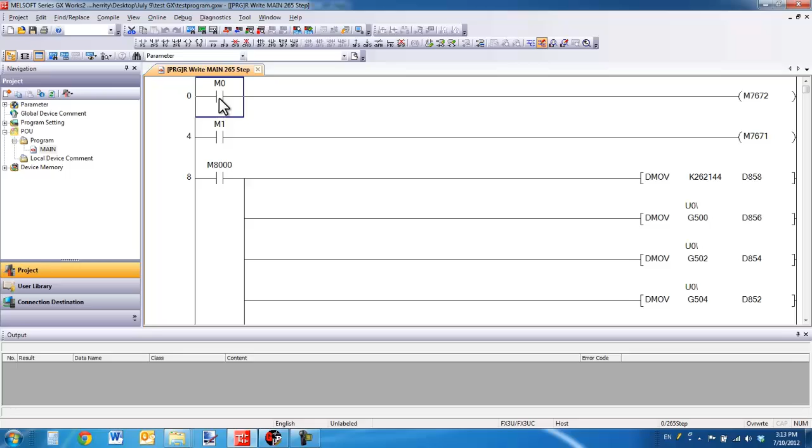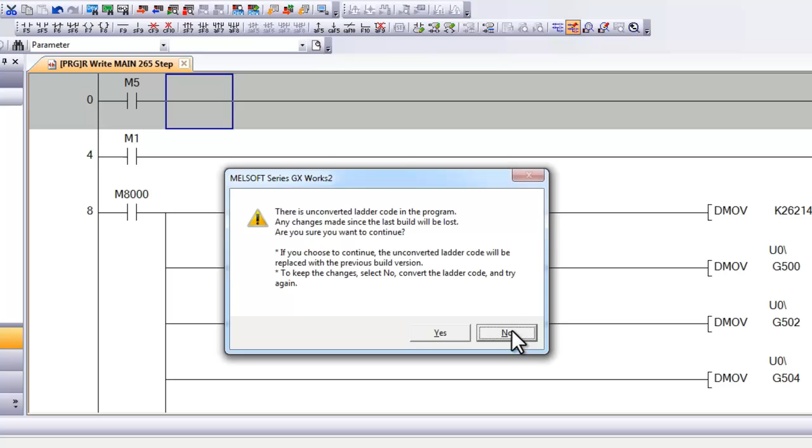Here I have in GX Works2 my program, and I'm going to make a change, and I'm going to hit F4 to do a build. A message comes up asking me if I want to make the change while I'm online with the controller. Even though I'm not, I'm going to say yes, and then I get a message saying that an unusable COM port was specified. If I say OK and then no to this next message, I have this ladder block in gray. This indicates that I still have not converted my code.

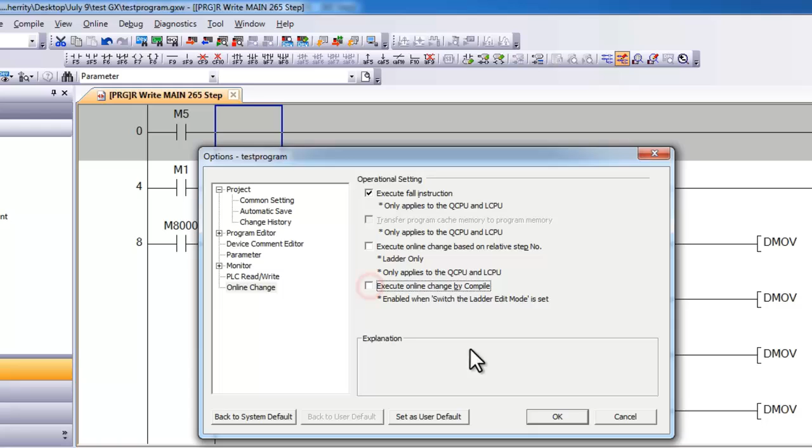In order to convert correctly, you need to go into the Tool menu and then select Options, and then go to Online Change and uncheck the Execute Online Change by Compile. This applies for GX Works2. Now if I say OK and hit F4, I can compile correctly.

In GX Developer, for the exact same situation, if I change this code and hit F4, I get the message saying an unusable COM port was specified. The software is looking for the controller because it saved a setting previously when you were online making changes.

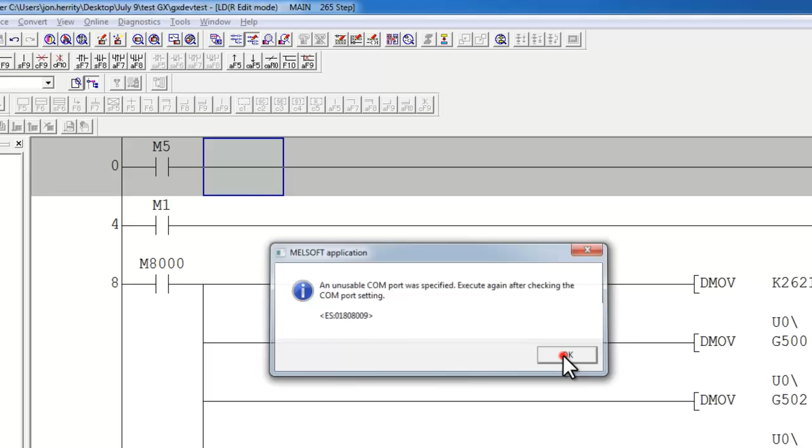So now I say OK and no, and I go to Tools, Options, and here I select Don't Write to PLC, and I say OK, and then I go ahead and convert, and it will convert correctly. Now I can save my project and that will go away.

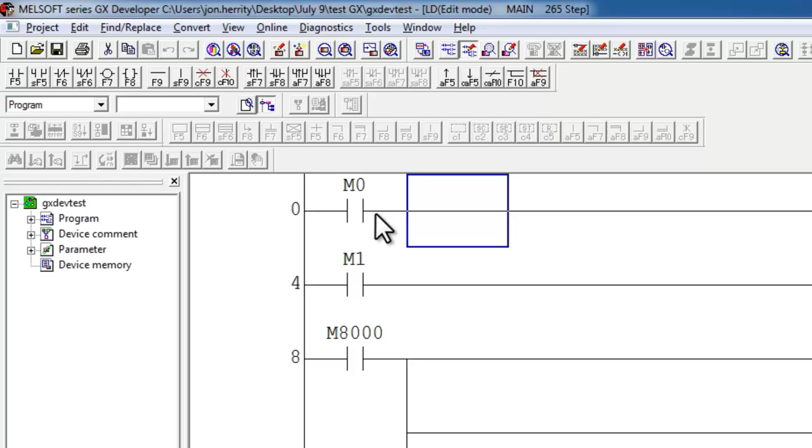Now just a little bit of background information. If I go ahead and plug in my controller here and make a change back to what it was, so let's say M0 and convert, this is what happened. I was previously in monitor write mode. Let's do it now. This checkbox refers to that setting in the Tool menu. And in GX Works2, when you do this, it will actually mention that this is in the Tool menu.

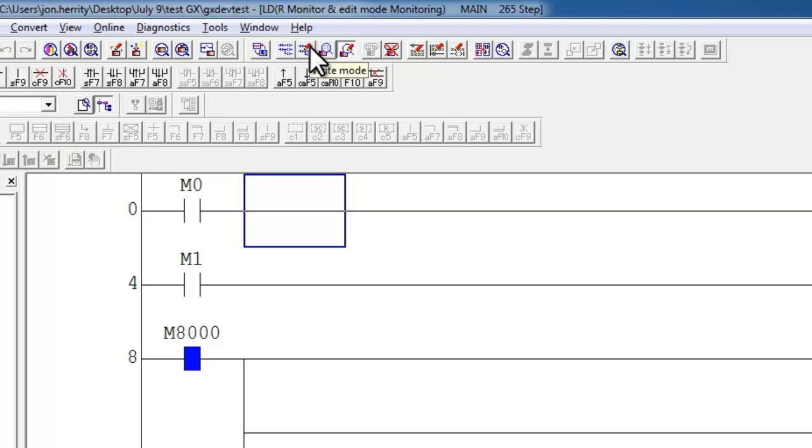If I say OK now, I am online, and this icon here indicates that that's the state I'm in. Now, in order to compile correctly when I'm offline, not connected, before saving the project and closing the software, I would need to change back to write mode, say yes, and then save the project. This then would avoid this issue.

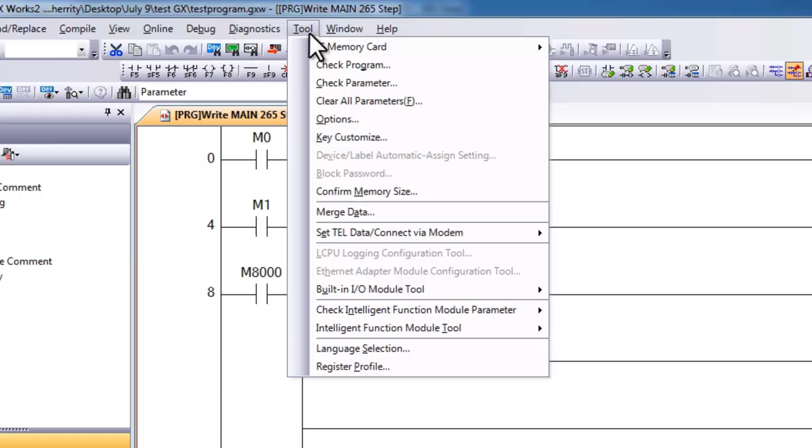Also, another way to avoid this issue, and a very important point, is with GX Works2, in the project here, if you go to Tool and then select Options, when you go to Program Editor, select Ladder and then Ladder Diagram, you can uncheck this Use the Switching Ladder Edit mode. What this will do is prevent users from using F4 to compile their code.

Instead, it will make it necessary that every time you make an online change to a program, you have to select Shift F4. This distinguishes the difference between an online compile and an offline compile.